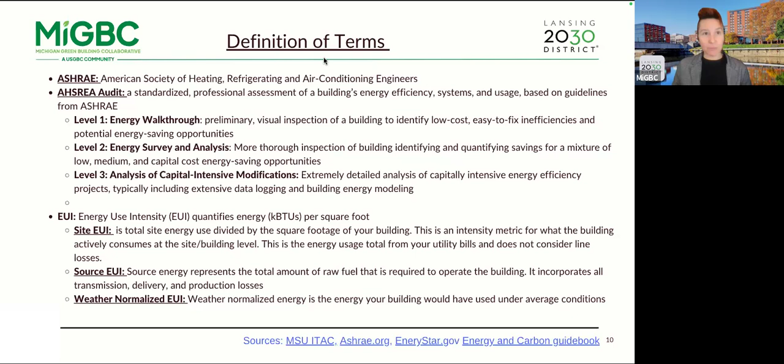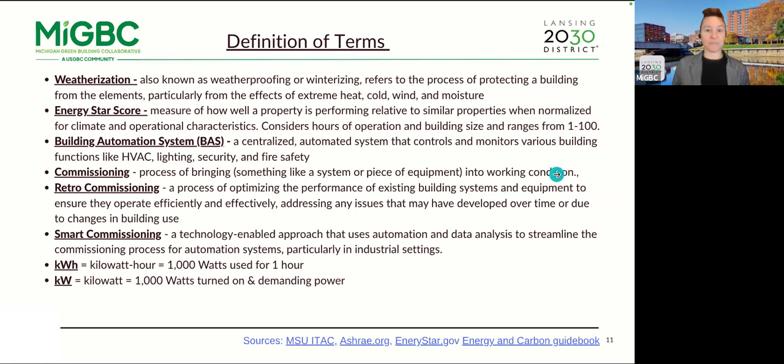Quick recap of what we learned in Energy Savings 101. We learned about the fabulous programs from Michigan State ITAC as well as BWL - thanks for being here again today. We reviewed some common systems to evaluate and looked at low or no cost opportunities for energy savings as well as cost savings and how to implement those. We even took a gander at our utility bills and found some easy wins we could take. We discussed the preliminary walkthrough process, how you can continue to take action without engaging or investing outside of your organization. And we talked about the importance of benchmarking, which I'll touch on in one moment. There were some great case studies that reviewed some of these low, no cost, easy wins, as it were.

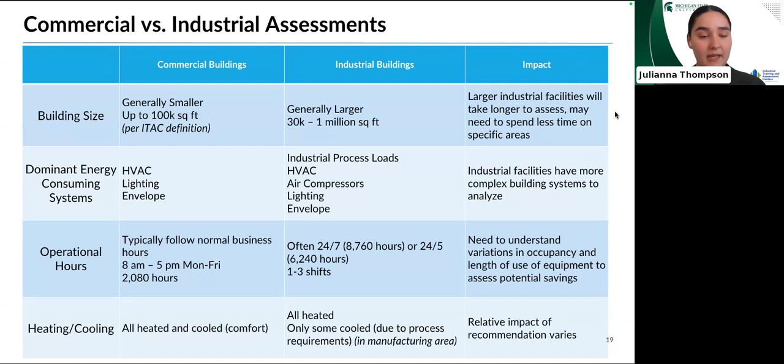So with this in mind, we'll move on to the different levels of ASHRAE audits. If you want to go to the next slide.

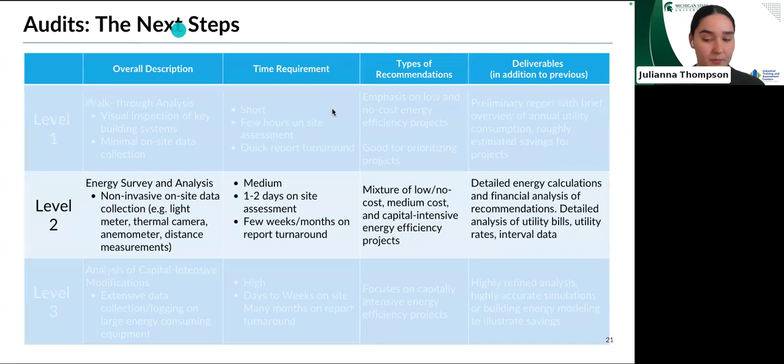Types of recommendations include a mixture of low and no cost options as well as medium cost, capitally intensive options, focusing on what the needs of the building are and what projects they're interested in pursuing. With the deliverable, we try to quantify energy savings as much as possible, and perform a financial analysis with implementation costs and payback period. We also do a more thorough analysis of utility bills, looking at utility rates and potentially interval data for industrial facilities. It's a level up from Level 1, but not quite as in-depth as Level 3.

Level 3 is typically something you'd hire out to a consulting firm. It's a much more detailed analysis, focusing specifically on capitally intensive modifications. These audits include extensive data collection and logging on large energy consuming equipment. The time requirement is very high - they might spend days to weeks on site and leave data logging equipment on building systems, with a report turnaround that could take many months. These focus on capital intensive energy projects, not the lower level ones. The deliverable is a highly refined analysis, typically involving building energy modeling for highly accurate simulations to illustrate savings. These are the most in-depth level, reserved for very complex systems and industrial facilities.

Here we show a high level overview comparing the 3 levels. I'm calling out some of the main differences. Level 1 is typically consistent with what a utility would provide. Level 2 is what the MSU ITAC program provides. And level 3 would be a potential different consulting firm.

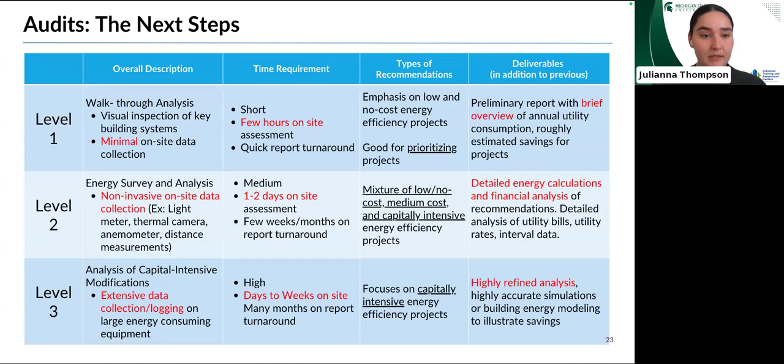If you're curious about having an energy assessment done, what might preparation look like? This is typically split into 3 components: pre-assessment, assessment day, and post-assessment. For pre-assessment, there might be some interest forms.

You have to let the utility or the MSU ITAC team, or whoever you're getting an audit done, know that you want one. For MSU ITAC, we require 12 months of utility invoices for electricity, natural gas, and water. There might also be additional supporting documentation requested, like a facility layout or equipment list, more specific for industrial facilities.

You could expect a meeting with the assessment team before assessment day to discuss logistics and gather some preliminary information about the facility, just to help prepare the team for assessment day.

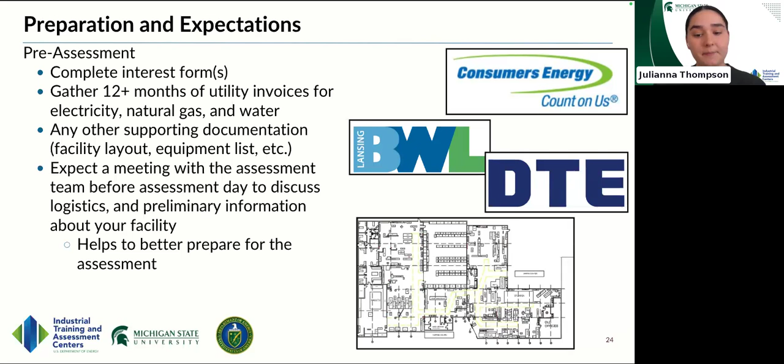On assessment day, one of the most key things is to have personnel available if you're having a team come perform an assessment. The more information that can be provided to the team, the easier it is to identify projects you're interested in, and to quantify the energy savings, as well as having accessibility to the facility as much as possible.

We've been in facilities with highly controlled clean rooms where you don't want to bring a bunch of people in, and that's totally fine, or there may be security concerns. But for the team to see as much of the facility as possible helps find as many potential recommendations. If you're interested in discussing any challenges your facility has faced, or projects you're looking at, that's wonderful for us to take a deeper look at.

At the end of the day, we'll have a list of potential recommendations that we'll share, and just want your input. If we've thought of an idea that you feel your company would never do in a million years, let us know. Level 1 assessments, as I mentioned, spend a couple hours on site and are mostly just a walkthrough.

Level 2 assessments do a walkthrough for the first half, then data collection in the second half with non-invasive methods. Level 3, and sometimes level 2, will likely leave data logging equipment for long-term duration, so they'll have to come back and pick that up.

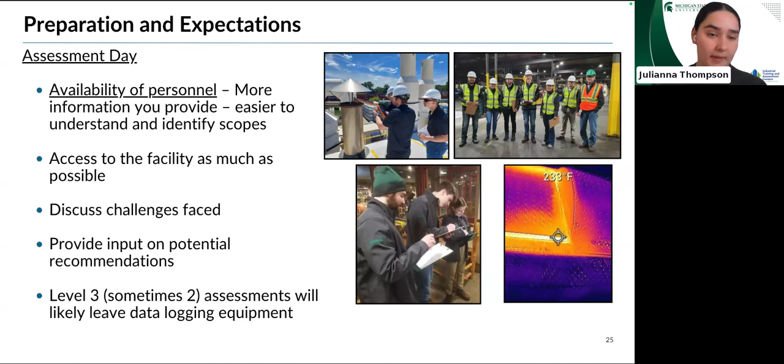We'll close here with what post-assessment looks like. After the team completes the assessment day, they take time to write a report. Typically there's some follow-up with remaining questions or requested materials to quantify savings. The final detailed report is presented, and we set up a meeting with the clients to go through the report, what recommendations we made, and answer any questions.

After an extended period of time, typically 6 months, 10 months, maybe 18 to 24 months, we reach back out to the company and ask what projects they liked and which ones they implemented, just to see where companies are going and what they're interested in doing. I think that is all of my slides, Audrey.

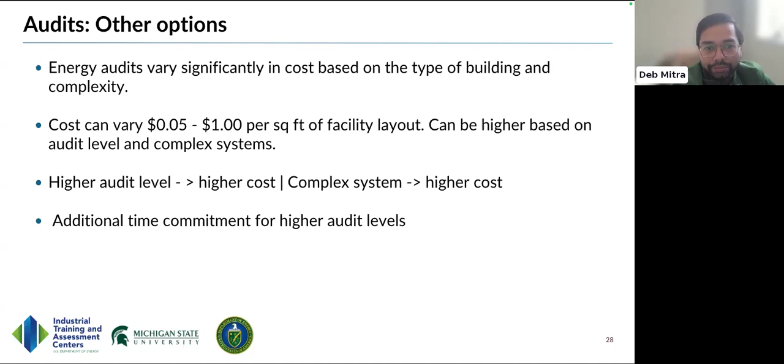My name's Nate, and I work with Glenn here. Just a brief overview of what we do: we offer incentives for energy efficient upgrades. So when you have an audit, and you don't necessarily need to have the audit, but it's a good next step, if you take part in what they were referring to, you can then come up to us and essentially request incentives to make those recommended improvements.

We have a wide variety of applications, and I just pulled up the link here. I'm going to put that in the chat. Here is a link to our webpage that will detail a lot of the different applications that we have. We also do home energy visits and stuff like that through the MEO program.

What this is going to do is obviously make your business a little bit more efficient, help reduce some of your maintenance costs, and improve some of your work environments when it comes to the quality of light, or just generally having more updated equipment.

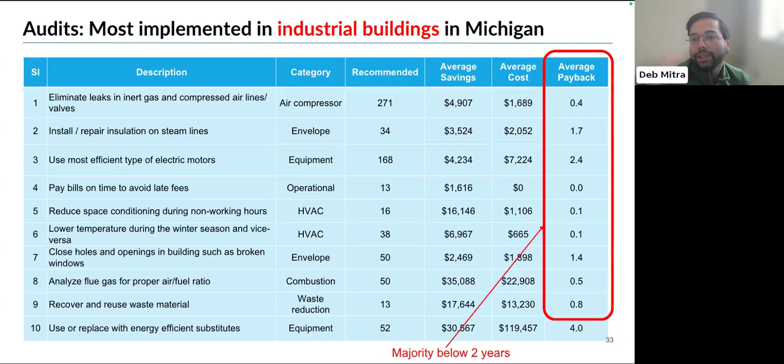Moving to the next slide, these are some examples for commercial buildings. We can see a lot of them listed as lighting, because in commercial buildings, lighting consumes a big part of it, along with HVAC, the heating and cooling.

Upgrading the lights to LED and then using different types of sensors, like occupancy sensors, or if it's outside in the parking, photo cells for dusk to dawn lighting controls, and maybe dimmable lights. Those are the lighting solutions which are generally comparatively easy fixes, and that can result in a good amount of savings.

For HVAC in commercial buildings, it may be difficult to replace the whole system, but some parts can be improved, like using variable frequency drives, which help the fan modulate at different speeds rather than running at constant speed the whole time.

Those have high potential for savings, and generally most of the time they also have rebates. So these are kind of easier opportunities to look into.

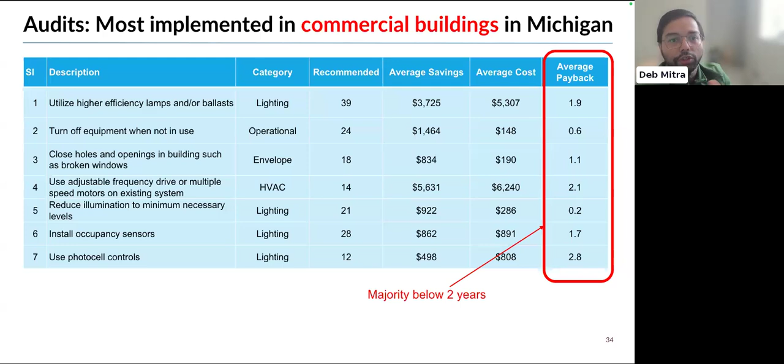Moving to the next slide, here we try to come up with a few case studies we did in the last couple of years. This one is for an industrial building on the west coast of Michigan. This particular industrial facility's total electricity and gas bill was close to $600,000.

All the heating and cooling equipment there, they have a total of 13 rooftop units, but all of them are more than 25 years old, and some are not fully operational. Since it's difficult for the facility people to find a suitable replacement, we suggested possible options, not specific company names, but sizing guidance from what's available in the market, which can result in possible savings of close to $50,000.

We also saw that in a lot of industrial facilities like this one, they have dock doors literally open to the outside. Whenever the door is open for semis to connect to the facility, cold air gets in during winter, or hot air comes in during summer, which makes the HVAC system run way more. Having an electric air curtain, which reduces air infiltration from outside to inside, saves a lot of money.

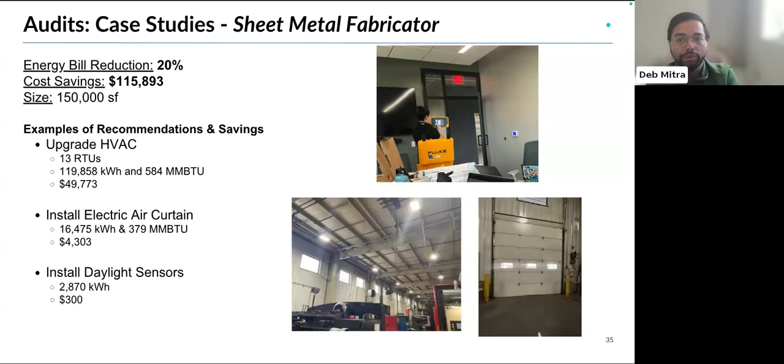Similarly, the next slide is for one of our commercial conference centers at MSU itself.

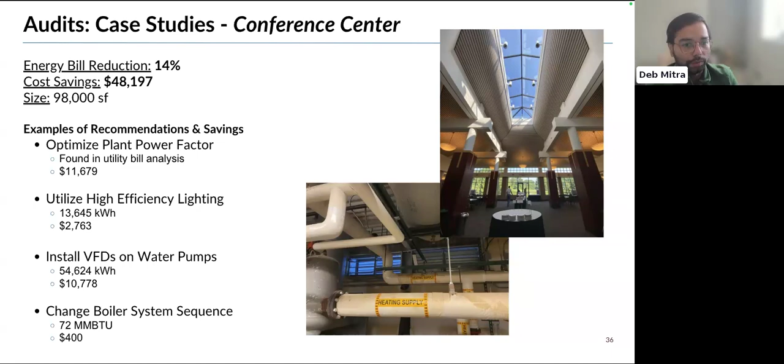They are using high bay lights, like fluorescent bulbs, that can easily be replaced by LED. The building has a boiler and a chiller, and all the pumps were running at constant speed. So every time the chiller or boiler kicked in, it put water at full flow, which isn't needed considering the shoulder months. That can be controlled using a VFD. The boiler was also on irrespective of outside temperature. It can be controlled so that when the outside temperature is below a certain level, only then does the boiler turn on. These kinds of scenarios can help save a good amount of energy and money.

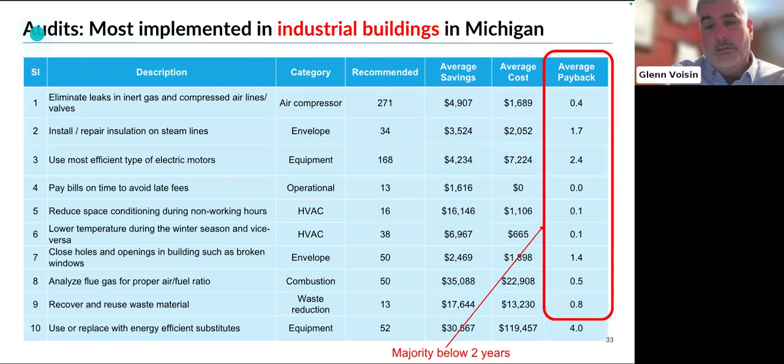We had the list from ITAC, I don't know if you want to go back to that. The list of measures and the payback periods - one thing they'll be able to do is, yeah, right there. So at the bottom you have one that's a 4-year payback, and your company says well, we're only going to do anything that's 2-year payback or less. But if you pair that 4-year payback with another project and lump it into a bigger project, you could get that payback down to 2 years. So then you're still able to do those type of projects. ITAC will talk about that probably in the initial meeting.

What is your automatic payback? If something can fit a 2-year payback, will you automatically do that? They can work that out so that more of your projects can hit that corporate payback threshold, I guess. So don't think that just because something individually has a higher payback period, if you go with multiple projects all lumped into one, that one project can hit that threshold, and you get your CFO on board with this, willing to finance it because he knows overall everything's going to work out.

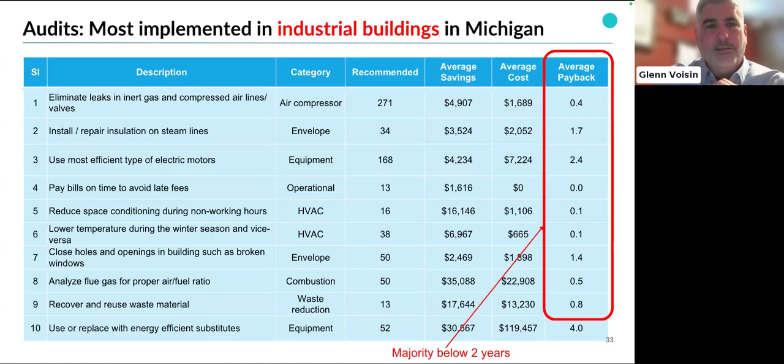I just saw that, and some people get real itchy if it goes over 2 years, and others say 7 years and everything's good. But there's a lot of people itchy at 2 years. So pair those projects together, and that works out for everybody. You get more projects done, and things work out.

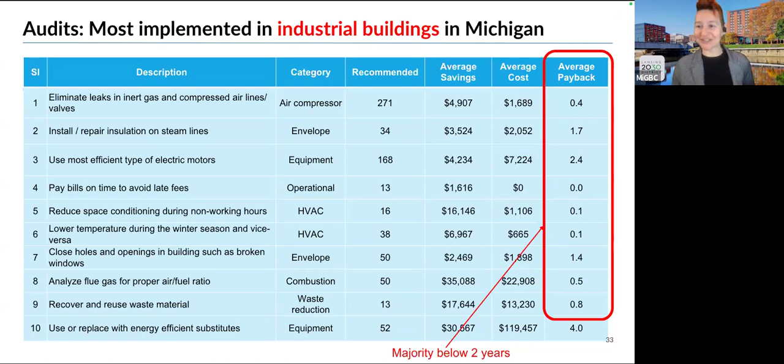So that's what you're hearing, the terminology: bundle and save. I think it'd be applicable here. Bundle your projects together, there you go. You really get more bang for your buck, as it were.

So a super quick recap: we covered so much, the what, where, and how of audits, some opportunities to save outside of audits, some of the financial impact and implications, and some great real world case studies.

Because we're getting a little short on time, I want to jump into panelist questions. I did see one come through in the chat that Glenn responded to, I'll name that in a minute. But one question I wanted to ask was, what do you think is one investment that almost every facilities manager should take that they're perhaps overlooking today?

One thing that I think people overlook is controls, controls for lighting, controls for HVAC. Nowadays a lot of that stuff is wireless, so installation costs are a lot less than they used to be. Before, people had it done and it cost so much because they had to wire each piece of equipment to the computer. Nowadays things are a lot easier. It was expensive before, even the initial boiler stuff was expensive, but things are getting cheaper and cheaper. You do need the expertise of a person to set it up and get everything linked together, but I think it's well worth it, kind of like benchmarking. If you can't monitor it, you don't know what you're missing.